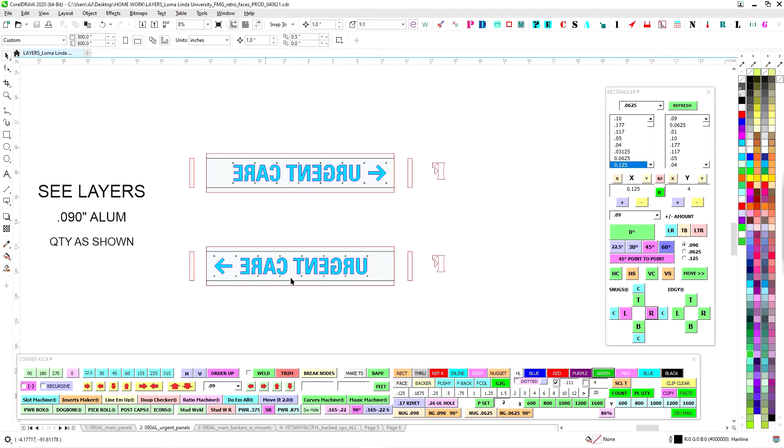Here's the parts breakdown. It's pretty much all 090 and white acrylic. You've got all your main panel faces, and you've got 14 of the backer pieces there. Urgent care panels, I just went ahead and put them on a separate page to keep them separate.

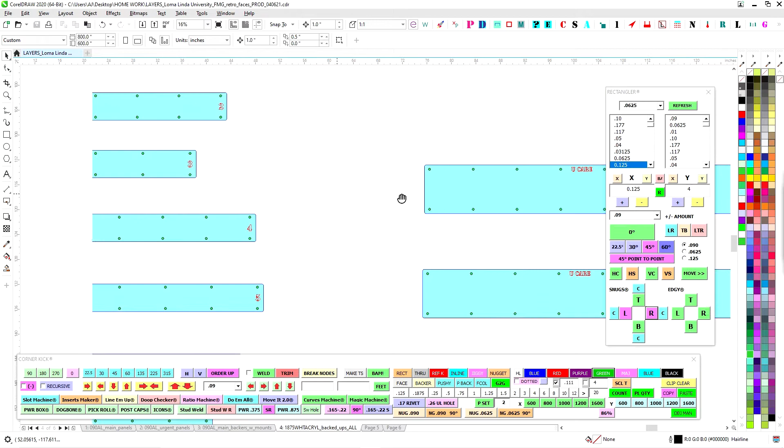We've got the backers, the actual backer skin plate, whatever you want to call it. These are going to be for mounting, I'll go over that. Everything's all white acrylic backed up. So we've got urgent care here, and each one's numbered for which one they go on.

Pretty simple, nothing major for fab. I would like to go over the install here in a bit. I would like whoever's going to be installing this to actually watch this. Jonathan, we talked about different things — maybe Jonathan also watch this and pass it on to whoever's going to be installing this. So we'll go over that.

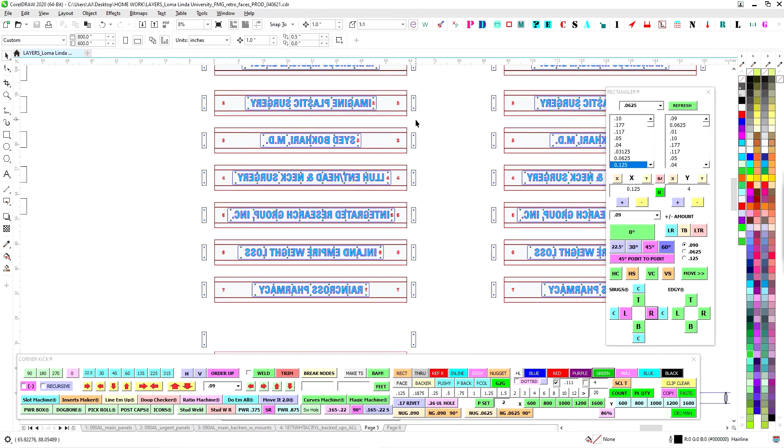But first for fab, it's all straightforward. Bend, shoot your studs, weld in your ends. These ends are symmetrical, so it doesn't matter either way how they go in. So you've got 7 on each side.

It's a double-sided monument. Let's get the lay of the land on the monument. So here's what we got — the urgent care here is just replacing the face, and then this frame system with slide track, the stuff that we've used before. There it is right there.

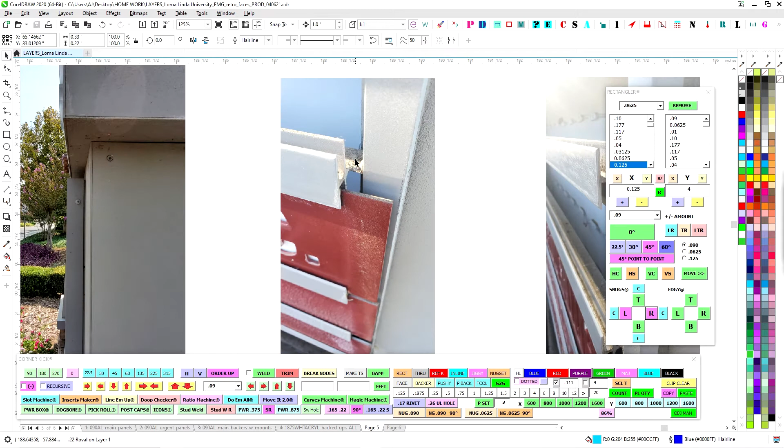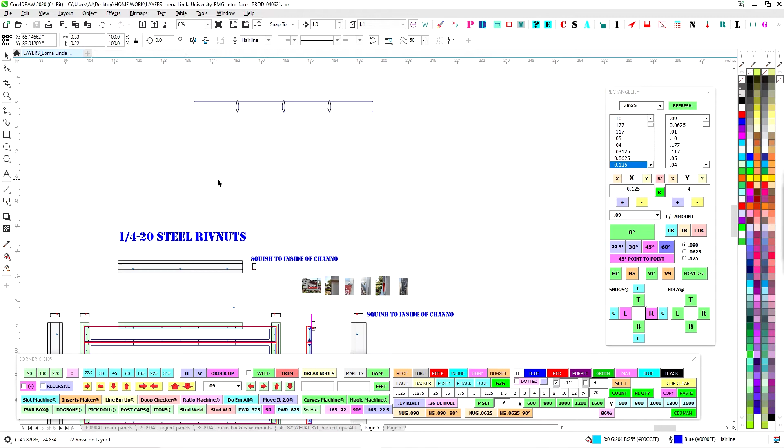So that's the existing stuff. The idea is we're just adding another one in. There's 6 here and they wanted 7. But in order for us to fit within this and all that, the track wasn't going to work, so that's why we're going with the foldy boxes method like we do. It's going to be easier on everybody, more room, and it's going to look cleaner. Anyways, that's the retro part there.

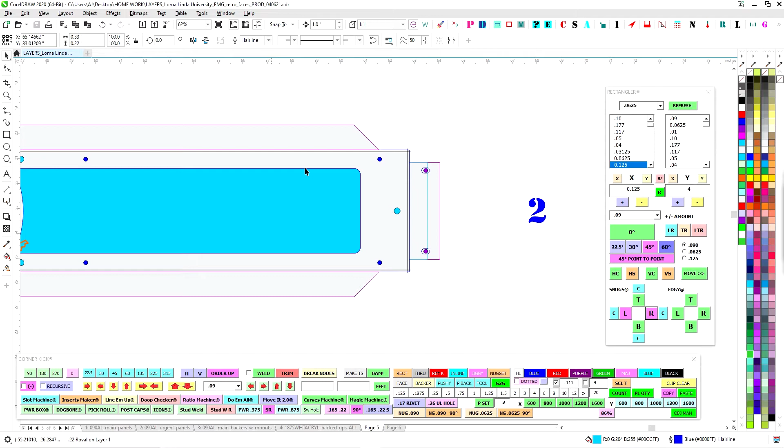For fab, it's not really anything of your concern too much. All you need to do is bend up these boxes, get them studded and welded, and then you're done there. Then bend up these backer pieces, 14 of them — 1, 1, 2, 2. These are symmetrical, doesn't matter, left, right, up, down, they're the same.

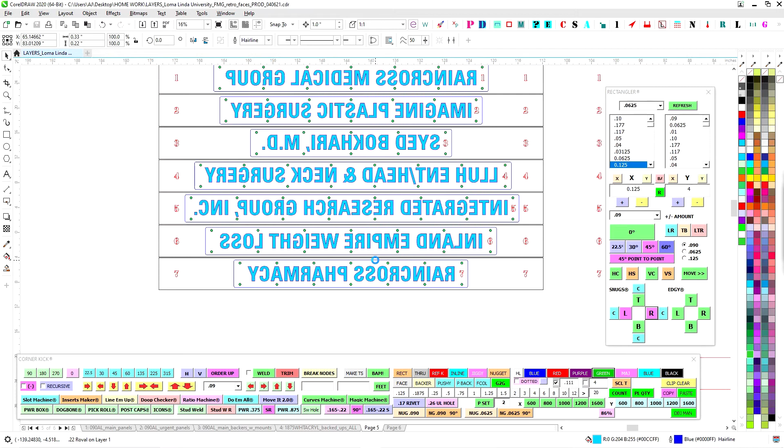Then you're going to lords each of these onto the backer panels, right on the face. You're just going to line them up, cleco them up. The outer perimeter is going to be like a beauty ring. You can see where the red here is the actual panel layout — these panels are going to be only an 1/8 inch apart from each other once this whole system's in place. It's just going to kind of look like that.

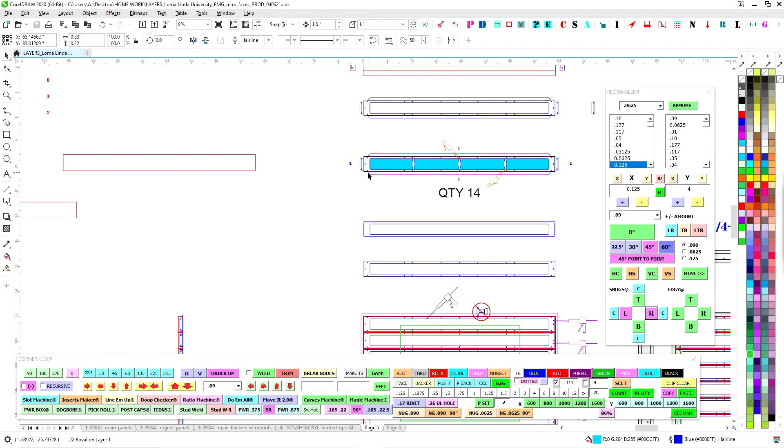So they'll just be tucked in next to each other, no hardware. If anything, you maybe can undercook — I have 0.03 on both sides here. If you undercook the blue a little bit, it'll give it a shoebox kind of tight friction seal. Maybe that'll help, and you'll have your 2 number 10s on the ends. That's kind of how it's going to look when it's all done.

This is 3/4 of an inch, so it's sort of like a beauty ring for the whole thing, and that keeps it as one big system. So you're probably not going to send it out with the faces on, but at least with the backer pieces it's one nice strong system.

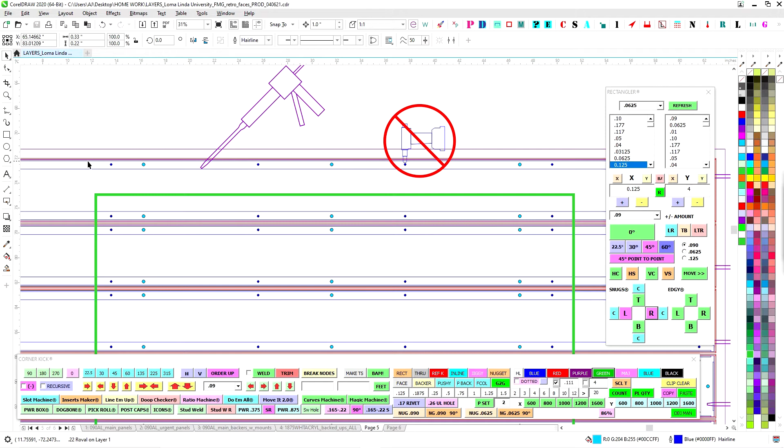Now, once you get this all lordsed up and clecoed, I'm saying that we don't rivet the outer perimeter. The outer perimeter needs to stay smooth because it has to sit on the existing face once it gets chopped out, so it's got to be flush and clean right there. Don't put any rivets around the perimeter, but you're okay in this area, in the inner meat — if you want to speed things along, you can shoot rivets all through here, that's fine.

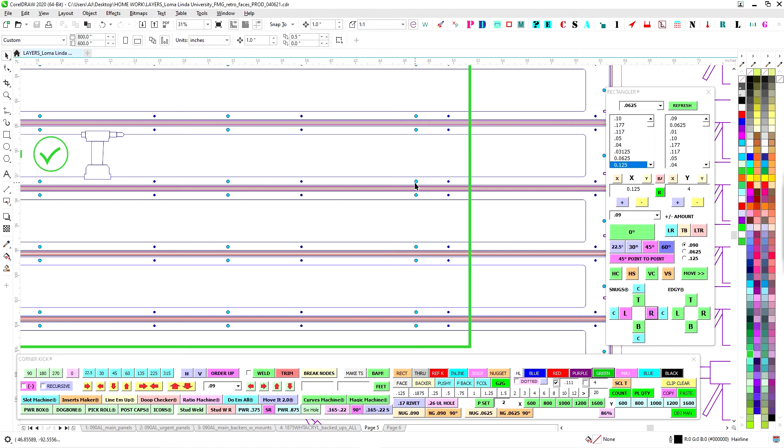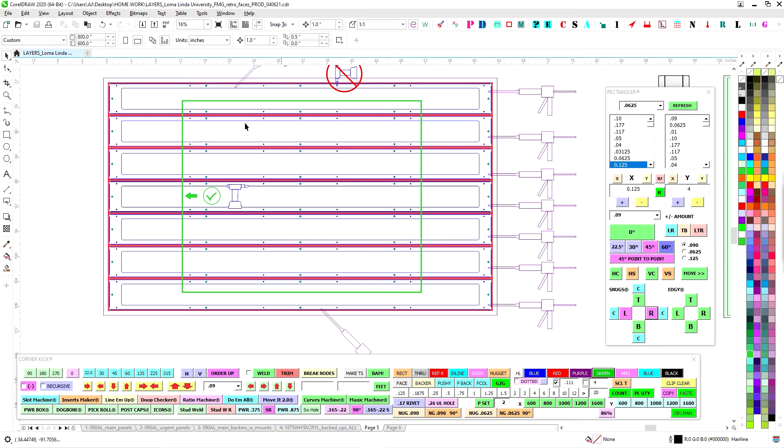These holes here are redundant in each frame. I didn't want to set up this one's on the top, this one's on the bottom, so when these lords on, these holes in the middle will look like I forgot something, but don't worry about it. There's only the perimeter mounting holes on this thing around the outside for install to mount this to the existing sign. So don't worry if you see that these holes aren't drilled through. Anyway, feel free to throw rivets here if you feel like it — no rivets on the outer perimeter.

All right, so once you have this all lordsed up and riveted up and everything, then you can go ahead and cut out these supports. I left 3 supports in each of these frames here because these are pushing 70 inches, and to have this kind of noodly in the break and all that — so this will give a little bit of support. Plus when you put this all together, it'll help hold it in place.

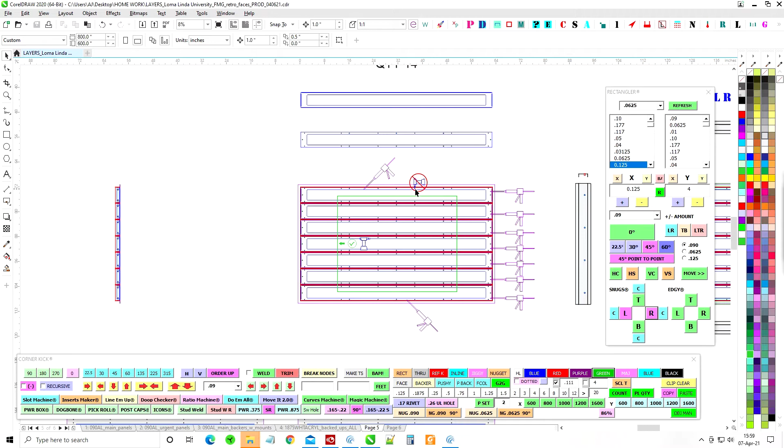And then once you have all these nailed down, duck saw, Sawzall, however, cutting wheel — just chop all those braces out. Then this whole thing will be good to go and you're done, out to paint.

So yeah, with urgent care, same thing — bend, shoot studs, weld up the ends. These two are out to paint. So couldn't get easier for that.

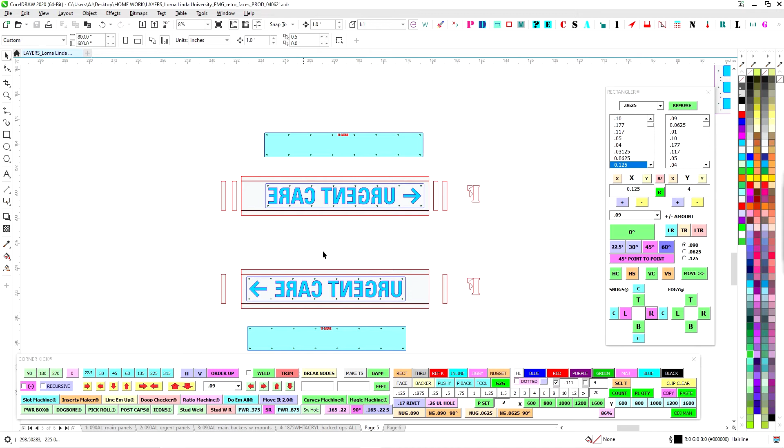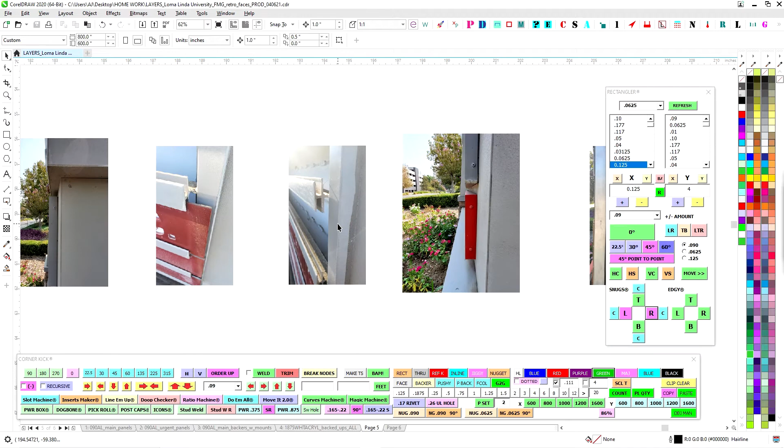So we don't really know how this frame sticking out is attached. Once this gets chopped out, I'm not quite sure what's going to be left for this beauty ring to attach to. So my new term is best guessing, pun intended. I didn't see that there was very much room here to bonk up against, so I kept this beauty ring.

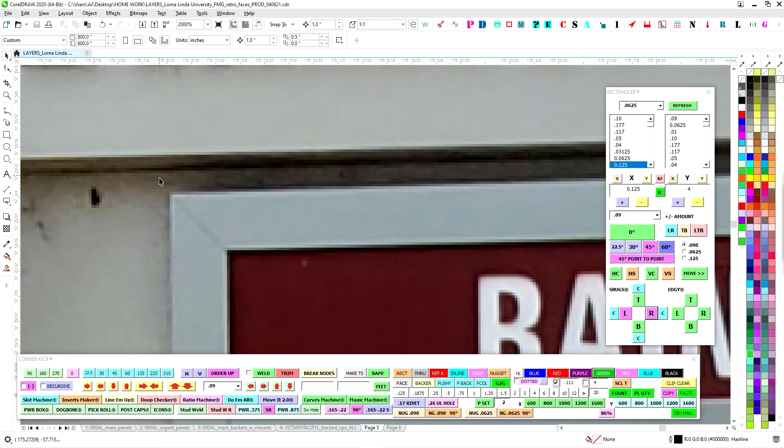So essentially, this gray frame is the size of the boxes themselves. The overall box size from here to here mimics that frame. So what I did is I created this backer that has 3/4 of an inch beauty ring all the way around. That buys us a little bit of space.

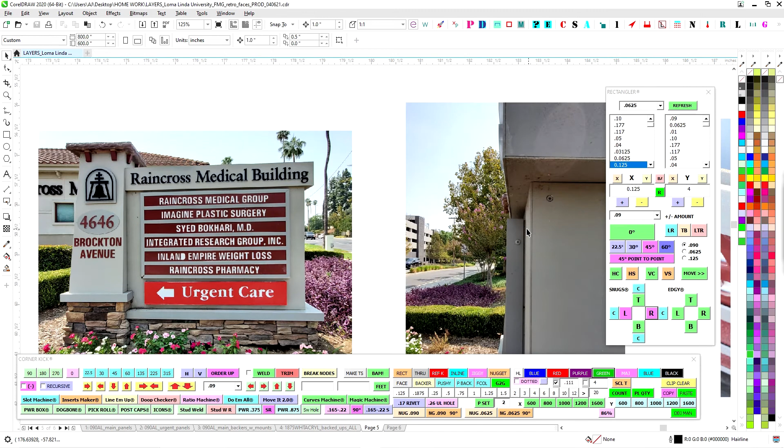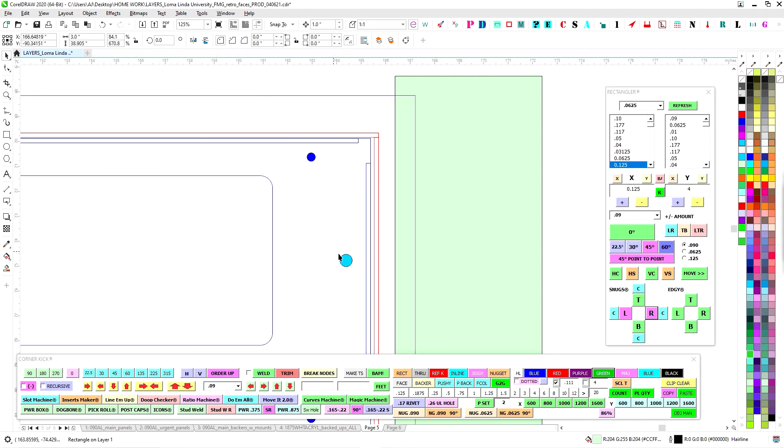Worst case scenario, best case scenario is that once this frame gets chopped out, hopefully there's skin underneath and the opening is actually like here. Ignore this for a second. Hopefully if the skin opening goes here, then fine - you're gonna just self-tap right through here, self-tap this frame right to the face. And up here, you'll self-tap all the way around. No big deal.

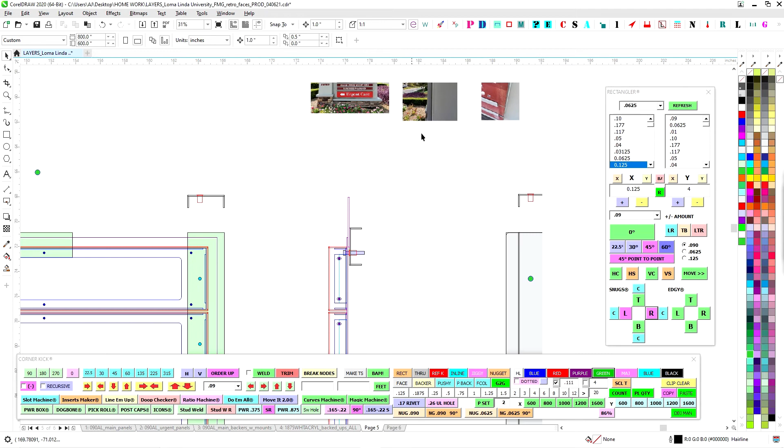I have a feeling though, and Jonathan was looking at it, that the opening is probably going to have to get cut to the size of this panel. So when you remove this frame system, the face might stop here, and that could be trouble, because now there's nothing - these screw holes are in space, nothing to screw to. Now we're going to be relying on just the 3/4 inch beauty ring.

So that's where we have options 2 or 3. First option is hopefully once that frame gets cut out, there's meat for this thing to purchase into, and you just self-tap this thing right to the existing skin and be done with it.

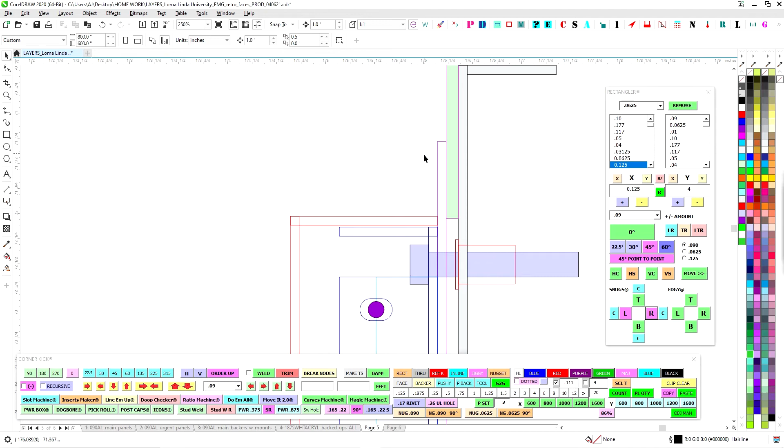Second option would be: let's say this is the face now, and you get rid of that framing, and now all there is the 3/4 inch beauty ring and this is like floating in nothing. Then bring these - like a secondary 'what if this happens' kind of thing - and you're going to put these behind the face, the skin.

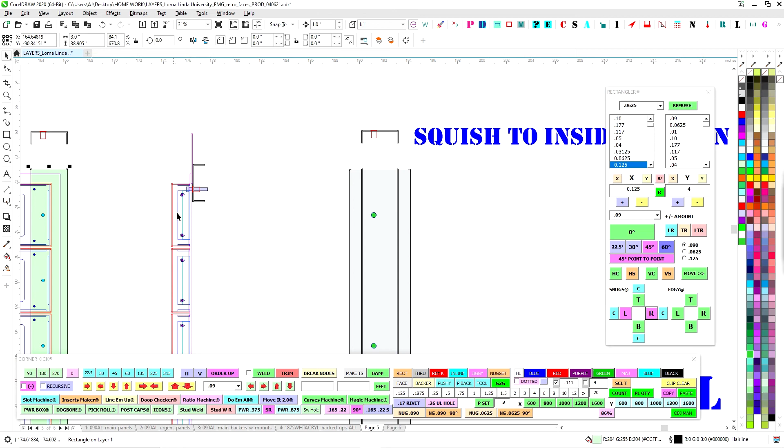So let's say that this gets cut out here, then you're just going to run this channel with the ribs facing out along the inside here, and then run it along the top and along the bottom, and then that'll be a clamp.

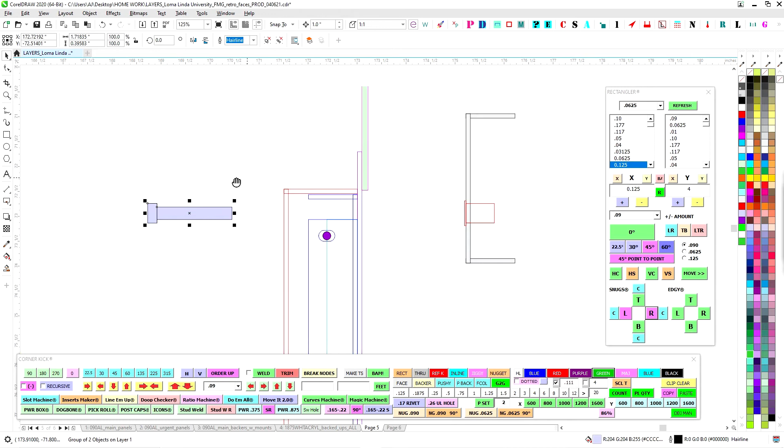So what you can do is take that channel and instead bring 1/4-20 threaded, fully threaded bolts. Put this thing up to the face of the sign and go ahead and trap this from behind, and then go ahead and just clamp it down.

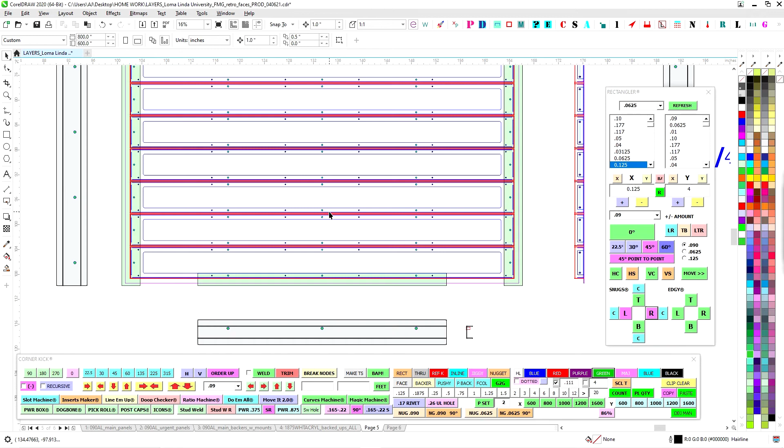You'll squish this along the top bar, squish this to the bottom, and then these will be the long runners that'll go past the opening here. So just in case you end up with an opening that is the exact size of this, and all you have left is the beauty ring to hold it in place, you can use this squish method and clamp it all the way around, and that'll hold it in place.

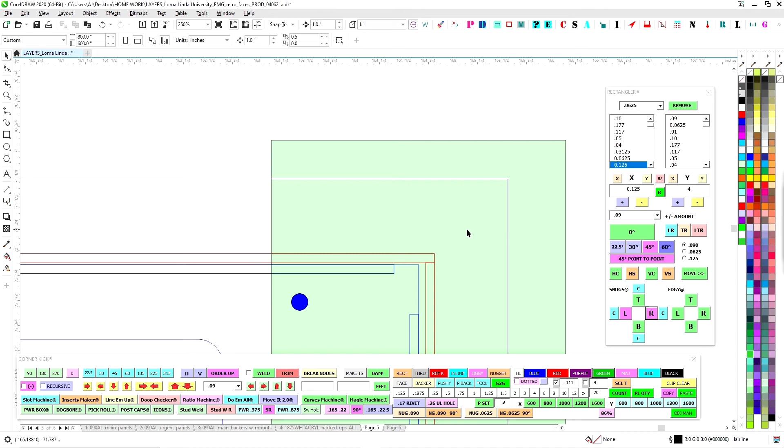If that doesn't work, if there's too much - maybe these things won't fit in there, or again we don't really know once you chop this out what's left - if it's really bad and that doesn't work, then your third option, if Curtis and/or Jim signs off, is just go ahead and drill symmetric, lay it out nice, and self-tap right through this flange, using the beauty ring as the mounting flange for this whole process.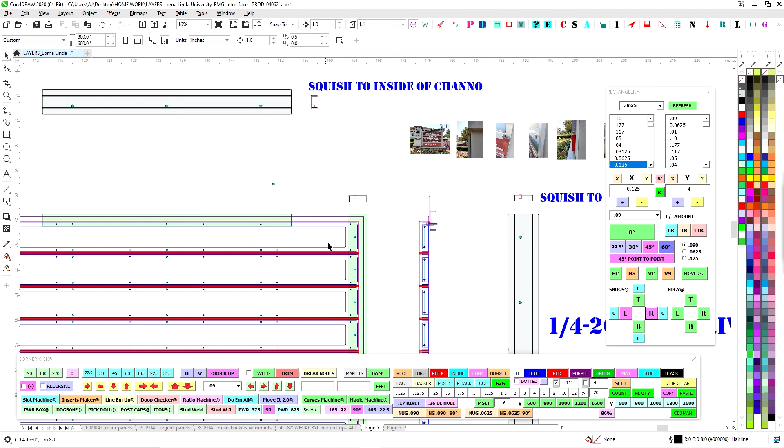So again, option 1: hopefully if it works out, there's meat left here where you can just self-tap this directly to the thing and you don't have to worry about any of this, and these become redundant - you don't need these. Option 2 is you do use these as a clamp system if the opening gets cut to where there's hardly anything left, then you can clamp from behind this system.

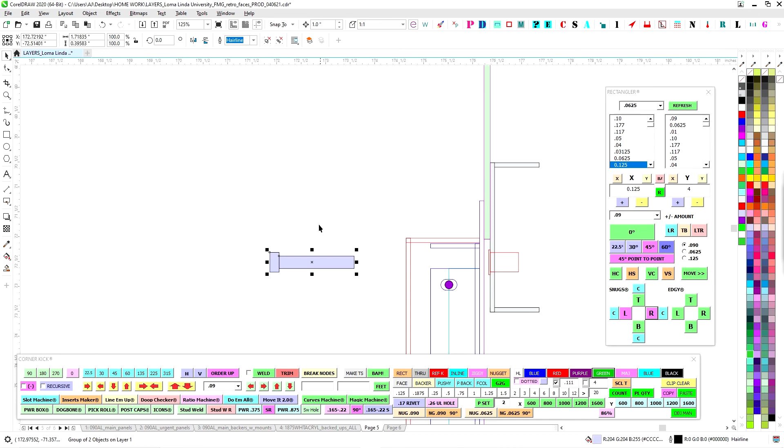For this system, be sure fabrication makes sure that some 1/4-20s threaded, fully threaded, get included with this. Install, make sure you get these bolts to go with it. And then the third option would be just self-tap this thing directly through the flange, and you'll see the screws - touch them up, whatever.

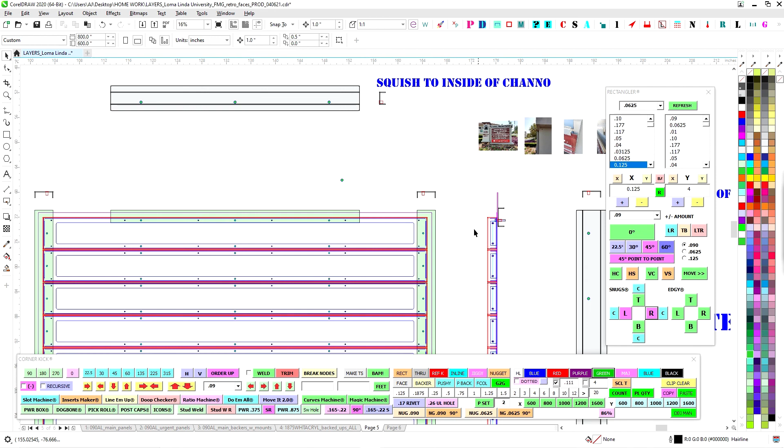So that's where I just wanted to touch base on the install method that I saw with this. Hopefully that works for you.

On the bottom for install, I added 090. I didn't know how big this was already, but I went ahead and added 090 around this to make up for the bend. I didn't know how tight or loose this bottom one is, so good luck with that.

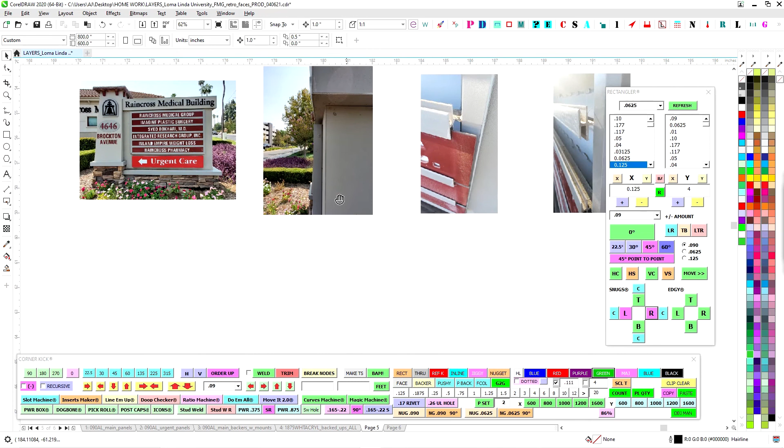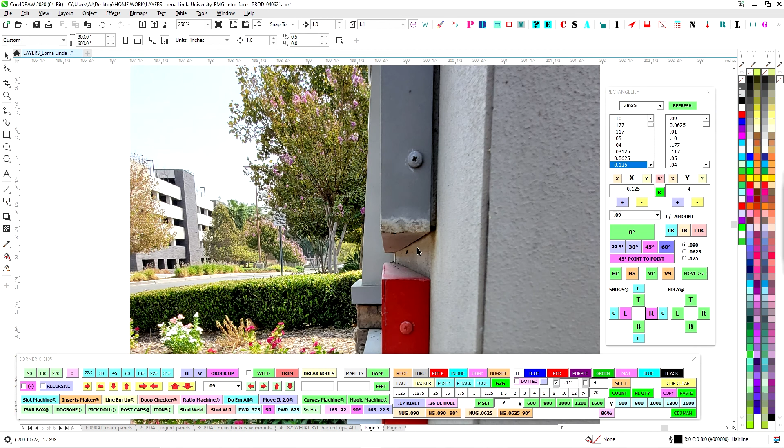I just tried to make it as universal and easy to install as possible. But again, just guessing off of this, it looks like the 3/4 inch flange that I added around it should be okay. So that 3/4 inch flange that I added for the beauty ring should come right around like that. Again, if you chop this frame thing out and the opening we're left with is literally the size of that flange, then that's your choice - direct shoot that right to there, or use the clamp system if it'll work.